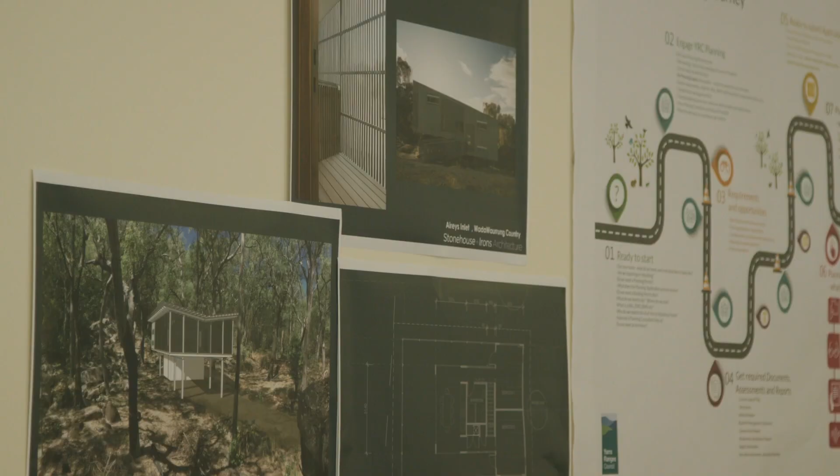I'll talk you through some examples, because we can't help but do this as architects - we love pictures. They're not necessarily, in terms of bushfire, BAL 40s or BAL flame zones, but it's more about design approach in those particular locations.

Do I hit a button or something? Just go to this one, second. Okay, but look, I'll keep talking.

So the first one you're going to see is Dean's Marsh, which is on Gadabanud country. We actually started the design of this before 2009, so it's a slightly different response to what we'd be required to do today. But in terms of our research...

But once we got the geotech done, we realised we were dealing with slippage.

So when you've got land slippage, putting retaining walls in and solid walls along the line of the site, the contour - obviously what starts to happen is it's getting hydrostatic pressure and it's really not going to work in that scenario.

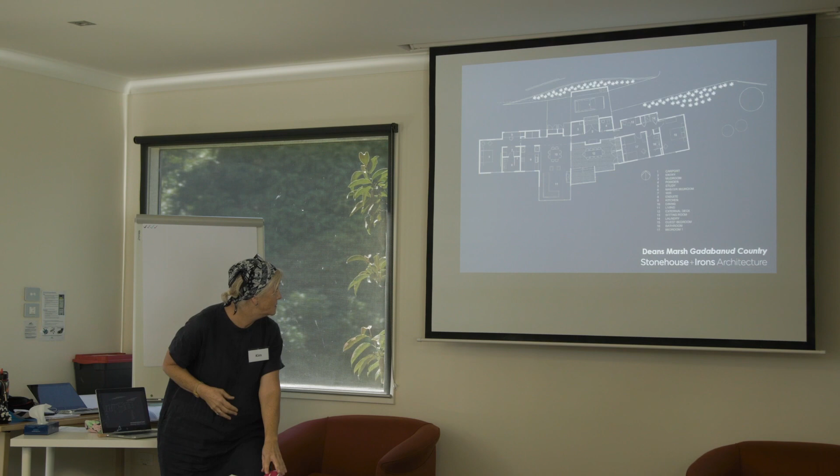So it's all about the view. So everybody's got a view except the laundry and the pantry.

Yeah, I don't think I need to talk about that much more. Why do I feel like I'm going backwards? Yeah, just keep using that. Sorry, right, there we go. Sorry, I should have explained where that was before, but I will.

So I think we worked out it's this one.

In the meantime, I don't know how many years ago, I came up with a concept about a little flexible cabin that could be built anywhere. It's a 2-bedroom unit essentially with a dining, living, kitchen, laundry space, bathroom. It's pretty simple. It was always the idea that it was a steel frame and that it had 3 sides to it that could be adapted to orientation in terms of getting views and northerly sunlight.

In 2009, the Office of the Victorian Government Architect called out to architects to say, has anybody got anything sitting in their bottom drawer? So we put this one up as an option potentially for people to rebuild, and it can be extended and adapted to more bedrooms. We spoke to a few people in Churchill who were really keen, and then they decided to leave Churchill after 2009, and that was fine. So the principle of it is very simple, sort of 2 bedrooms. We're now doing it up in, believe it or not, East Trinity Beach, just outside of Cairns.

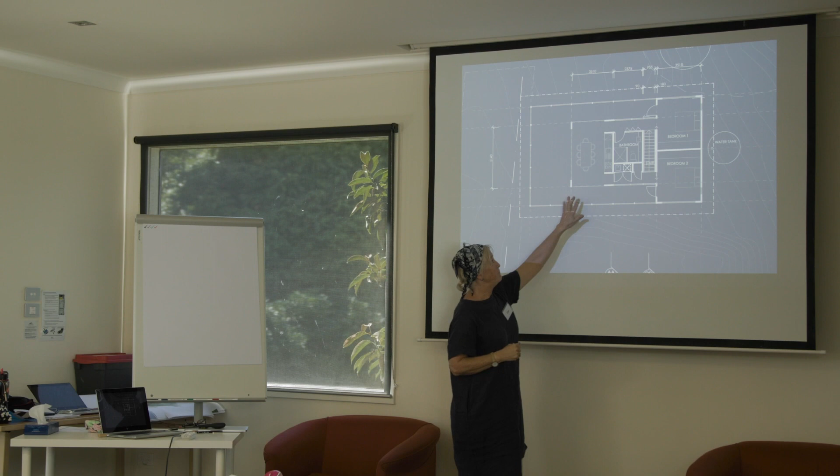So in terms of taking it up to a higher grade, basically the house is fairly open. It's North Queensland, so it's a bit different. But we use the fire shutters there to shut down the rest of the house to make it comply with fire. Again, it's adapted to the fact that we've got a different site.

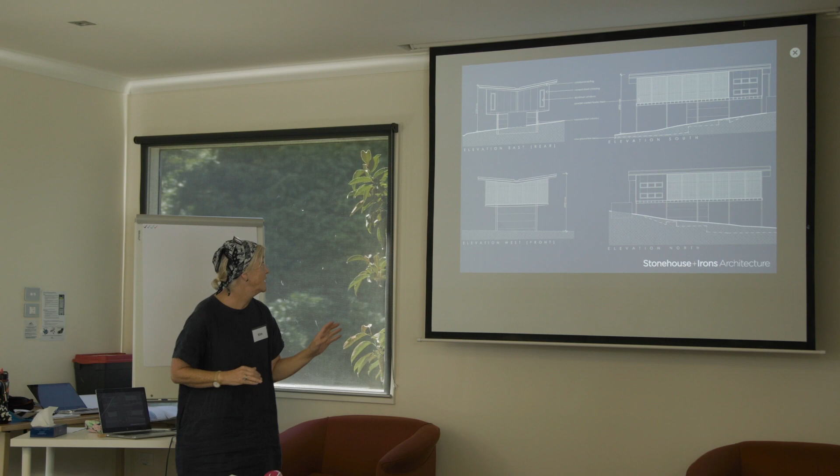And that's sort of it in elevation. So this is showing that idea of the sort of fly screen mesh. This one's heavy duty, cyclone proof. That's the other thing we had to deal with, cyclone force. So it's kind of, let's get the steel structure in dealing with that first.

This was a house we did later. We had to position it because of trees, and there was a covenant on the site protecting trees, but we worked closely with the client, looking at the trees they loved and avoiding areas we needed to. It's very much the idea of a contained building that opens up, and that's one of the principles we've used a lot in these circumstances.

What I call designing in rather than designing out. When we're thinking about a new house, it's better if all that research work is done early, so we know what we're designing to and how we design those issues in, rather than designing something and then having to layer all these things in afterward to get it to work properly. That way it becomes much more cost effective.

This house again is partially on stilts, but it was also very much about making a small footprint. They were really keen on their landscape and didn't want a huge footprint. So we've done some multi-use of spaces, because it is a holiday house at the end of the day, and do you really need a bedroom for every guest? Could we just find nooks and crannies for people instead?

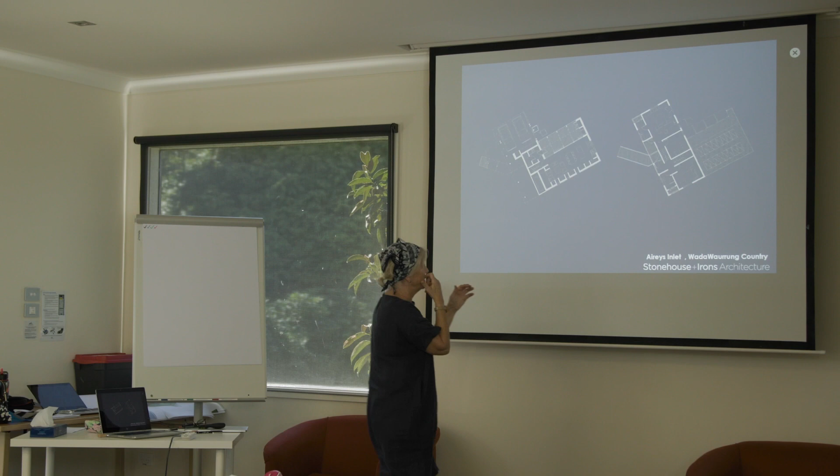This was the small footprint I'm talking about, so it's a little bit confusing. You come in at this entry level and descend down because there's a slope on the site. There are a few bedrooms and a workspace, but down here under this bedroom there's another day bed, and also a whole nook where you could sleep 4 people, albeit with their heads just sticking out the end. So we were building in sections like that, making it a fairly tight footprint.

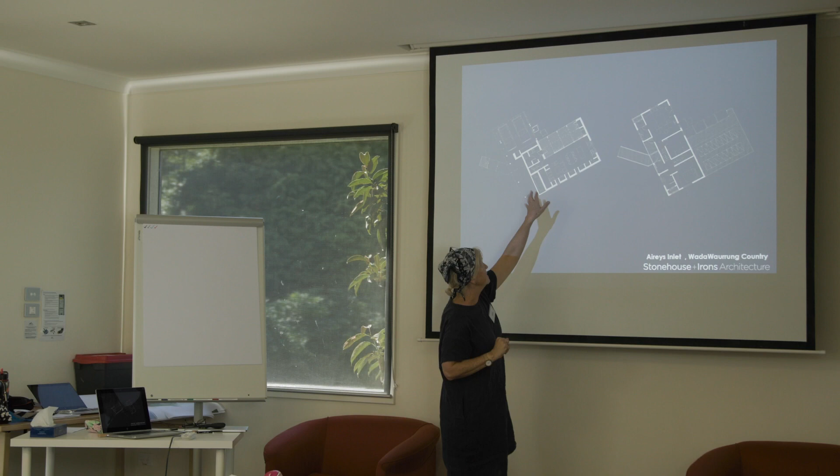Again, that idea that the veranda was sacrificial, with the shutters going along here, so it becomes quite a tight box. It's shaped this way because it's on the southwest coast, so we were trying to protect that external space from the southwesterlies - just trying to make a really small, efficient footprint.

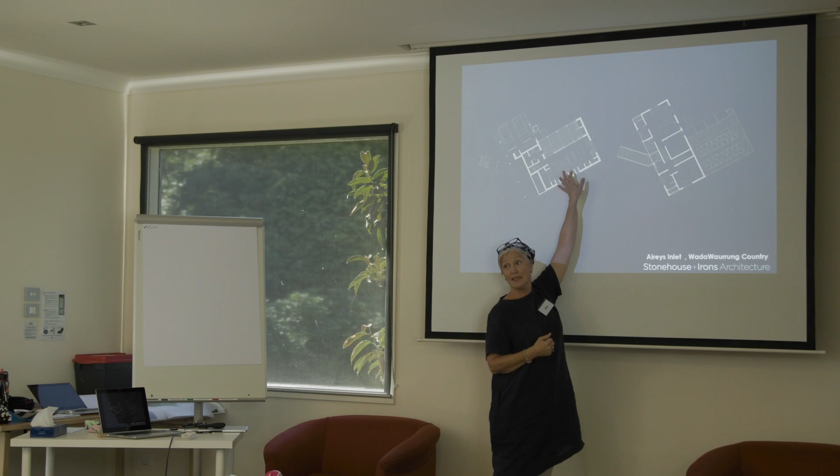With some thermal mass - along this wall we integrated besser block internally to make it fire resistant, and that's also become our thermal mass in that situation.

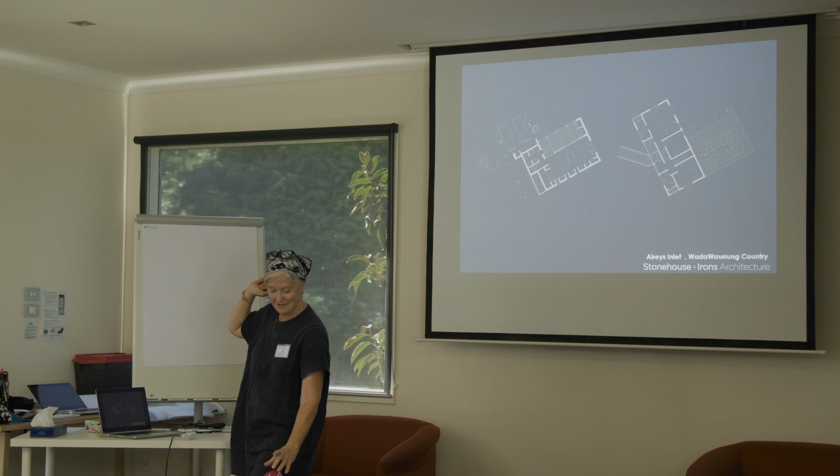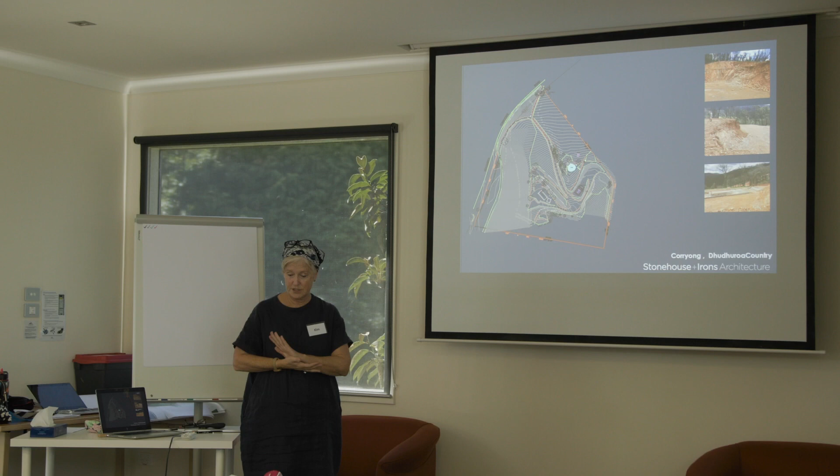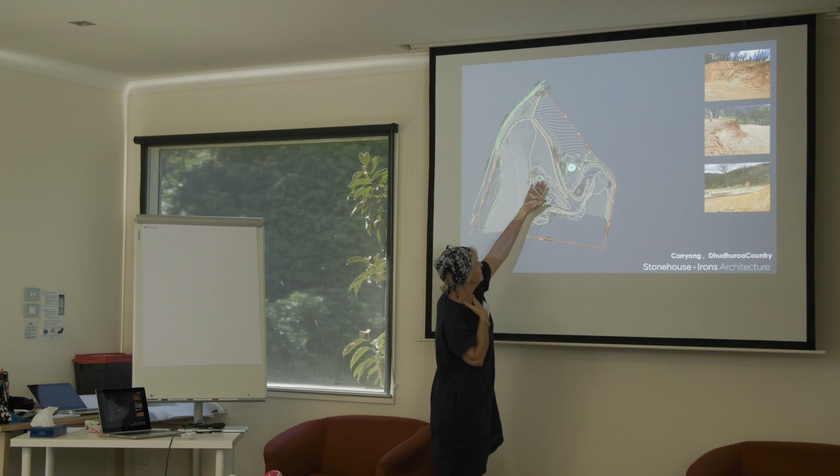This is the last one I'll talk about - a house we're doing as a result of the 2020 fires. This was very interesting: this was their existing site, literally on a ridge, with the state forest right behind them coming down towards them. It's quite a steep site, with bush up here - well, it had bush, but anyway.

It was already benched, which isn't necessarily the approach we'd normally take today, but there was a flat bench site already. What concerned me was the extent to which the site had been benched - what were we going to do about erosion control, about water runoff altogether, and did we need to stabilise that soil?

He's a bit gung-ho, lovely man, but we said just hold off for a bit. He had the idea of the plan already, and in the meantime we were looking at the site. In this circumstance, Bushfire Recovery Victoria appointed an expert panel, because it wasn't just a flame zone, but a high risk flame zone. So it took quite a while to convince him, but eventually when the expert panel came on, everybody finally convinced him that perhaps that wasn't the right site to be on.

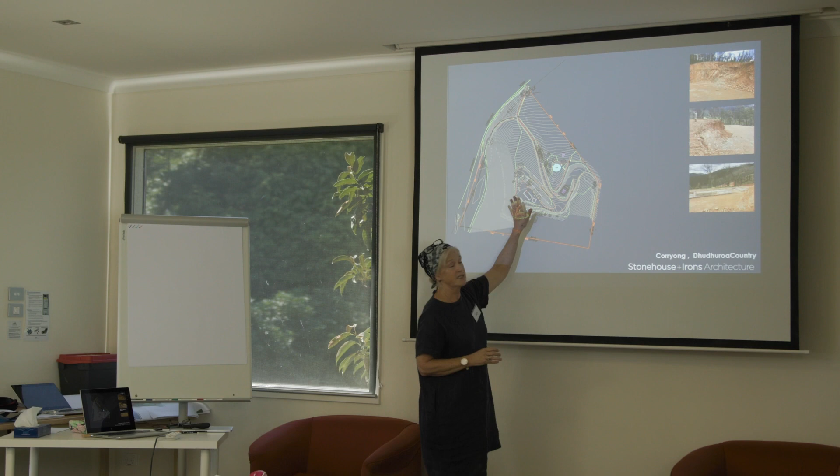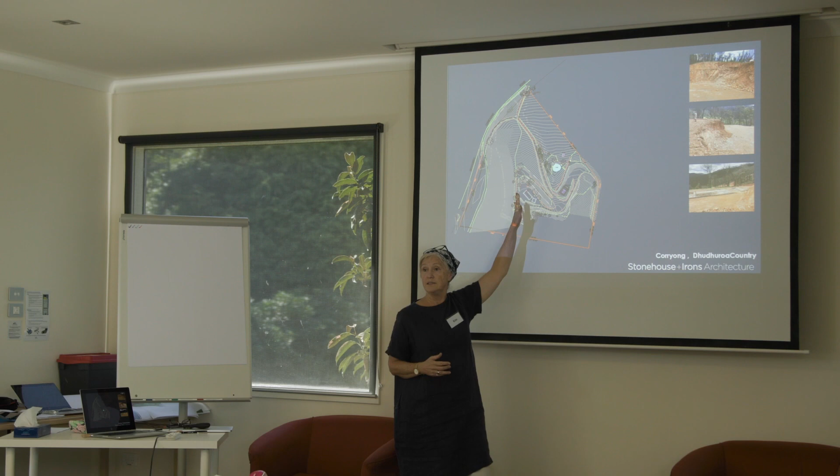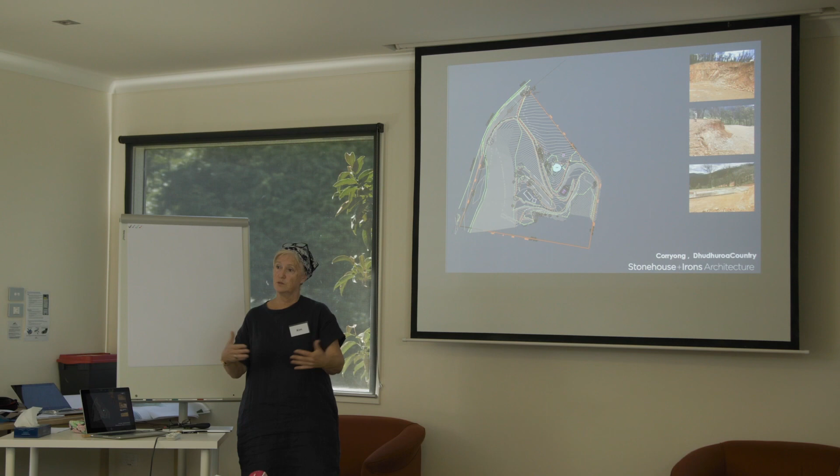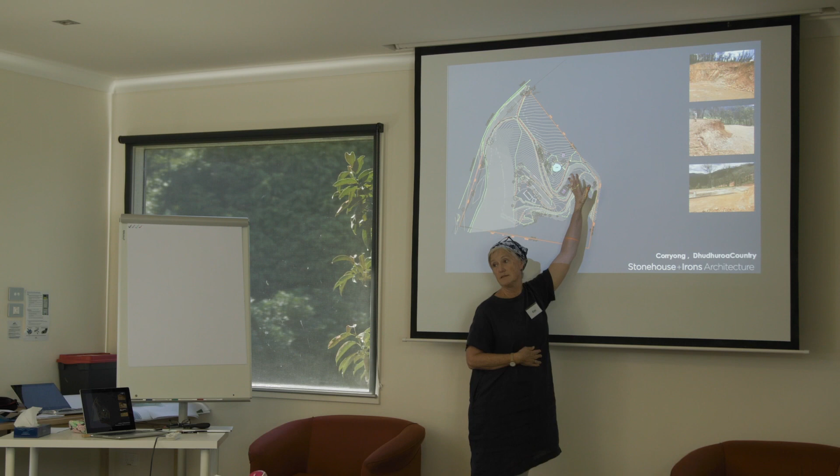He had the advantage of quite a large site, so what we've subsequently done, and he can see the merit of it, is we've brought him down to another bench site where he used to have sheds. The risk for him is far less, the extent of excavation is far less, and it's having less impact on the ground, the trees, and erosion. It's also made for a much more direct access for the CFA, albeit we've got to put in a passing lane. It's changed how difficult it will be for him to build, and all the other associated costs, so there's been benefits in that. It's been a road he obviously had to be comfortable with. What I should explain is that beyond this it becomes flat, rural farmed land, so there was far less risk associated with it.

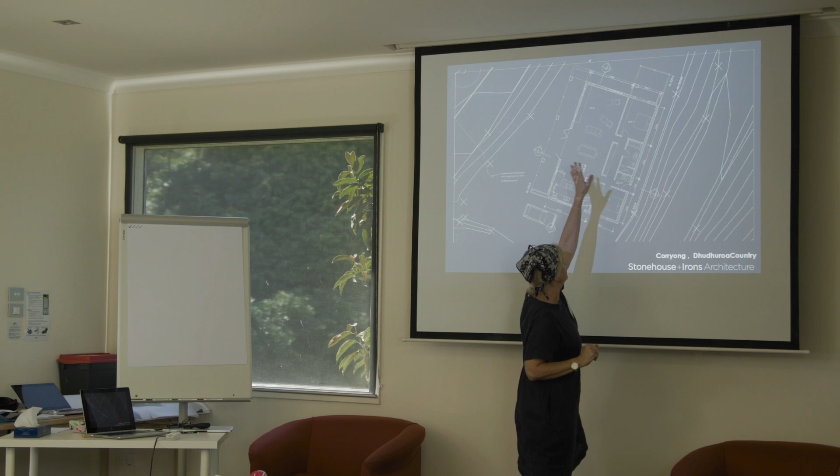So this is the plan, and again it's a much tighter plan, and it's triple skin brickwork, much at his request. So we've really wrapped it around with the triple skin, and the veranda is going to have drop-down shutters in this situation. Instead of layering it onto the windows, we're putting the shutters out the front, which means his windows don't have to be fire rated as well. That's an either-or — you could put the windows closer, but it means we don't have to protect the soffit levels under here. There's a whole lot of benefits for us in terms of what we're going to have to rate.

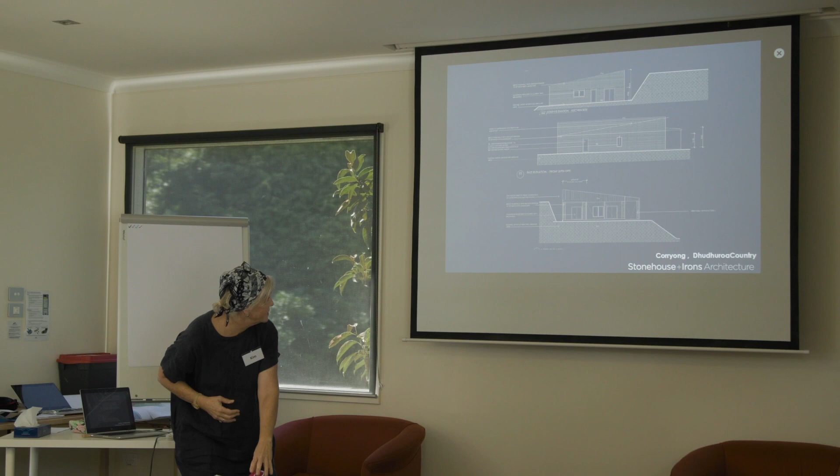The other thing about this, which the other architect will talk about too, was the idea of a single pitched roof. You can see these brick walls around three sides, and where it's opening there'll be drop-down verandas. It's a single pitch roof going down with the slope, so we're hoping it'll nestle into the landscape a bit and not be as much of a big thing screaming out. It also means far less flashings, a single point down to feed the rainwater tanks, and it's all fairly straightforward.

That's about to go into planning — so that's 2020. I think that's the point Rob raised, that it does take time. But if you can stop and breathe and enjoy the process, it can be an enjoyable process. It's a creative process for both the architect or designer and you, and it can be very positive. But it does require time, even for clients who haven't necessarily been through what you've been through — they still have to take the steps through. So try to take time to enjoy the process, and remember it's about building yourselves a home. As Rob said, it's about where do you see your future, where do you see yourself on this place.